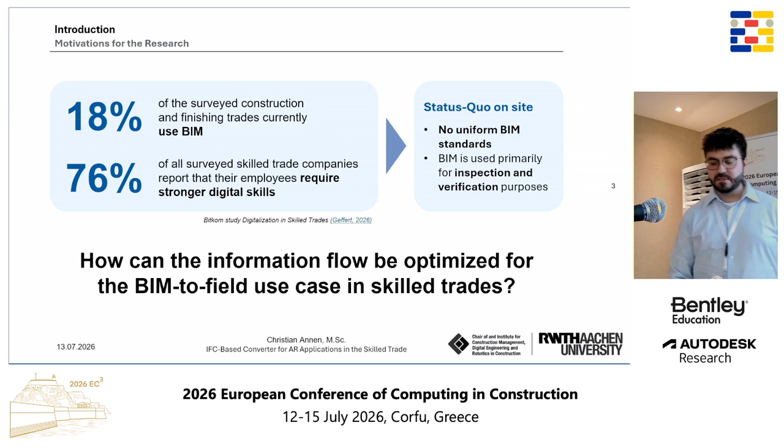So I came to the research question: how can the information flow be optimized for the BIM-to-field use case in skilled trades? And for this, I give you a quick insight into our workflow. In the first step we have the BIM-to-Unity workflow, so that the BIM data is readable by a game engine, and afterwards the data will go to the construction site. But in this paper, I'm focusing on IFC-to-Unity.

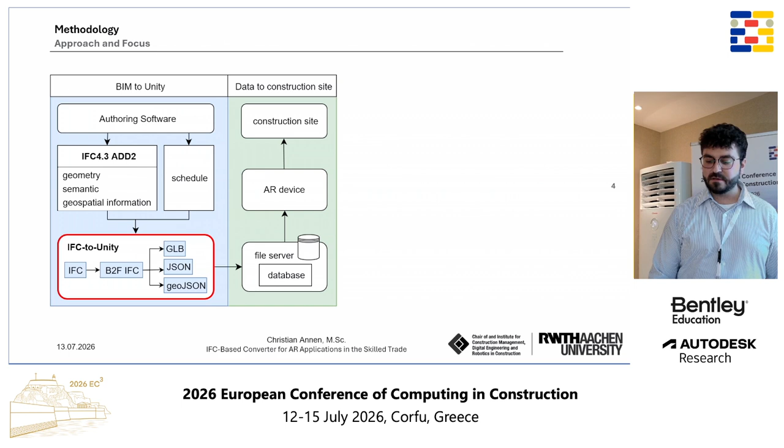So how can we get our IFC data for our use case in the form we need for the game engine? We have the IFC from the planning phase, then we enrich the IFC, and then we extract the 3D data as a GLB, the semantics as a JSON, and the spatial information as a GeoJSON. For this, I started with an exploratory literature review, and then I defined core information for this use case based on IFC.

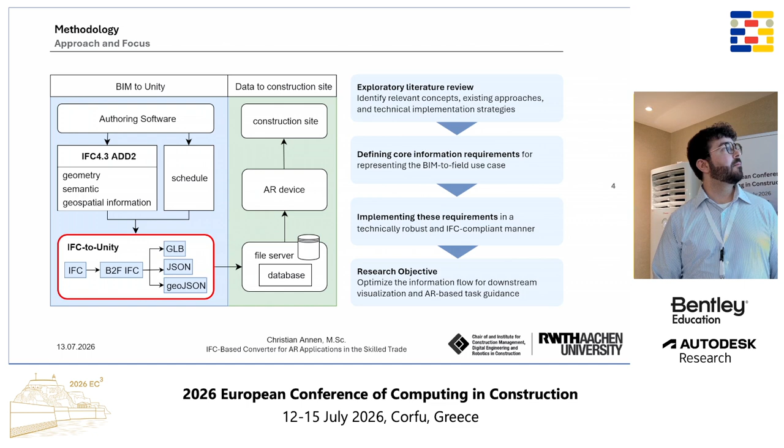Therefore, I studied the IFC schema for quite a time, and afterward I implemented these requirements into the IFC-to-Unity converter I'm presenting here. By analyzing the IFC schema, I started with a categorization: first of all, the worker on the construction site needs to know which element do I have to build, then the schedule, when do I have to build it, then who is responsible for it, so do I have to build it or someone else, and then where is it located.

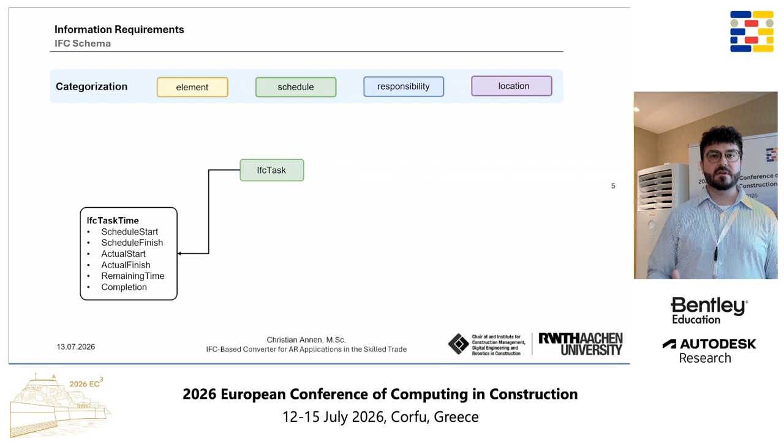To start with the schedule information, we have IfcTask. This IfcTask you can specify by IfcTaskTime. This is very good to monitor our status, so the worker on the construction site can say, okay, the completion is at 50%, and we can also monitor the times. Then we can assign to this the IfcProduct, so the element itself, and this element we can also group so that we can locate the element.

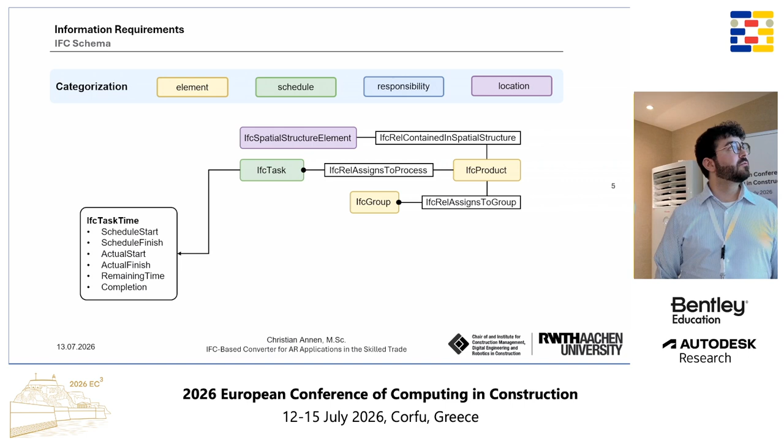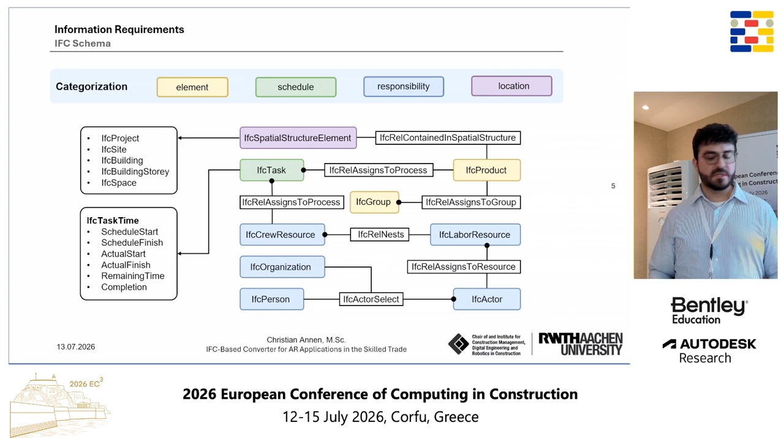We can use the IFC spatial structure, so we also have the opportunity to guide the worker inside the room he needs to go, by IfcSpace. Then to the IfcTask we can add the IfcCrewResource, so the trade itself. This trade can be specified by the labor resource if you have a special role inside your trade. And we can specify this role by an actor, by a person, or by the organization. So we have the opportunity to reach everyone on our construction site directly via the AR device.

Another interesting and I think important point is how can we bring the model to the site, and what have we considered here? For this, IFC also has quite a few options, like the IfcMapConversion. There we can store the data for the spatial placement, and this is also specified by the IfcProjectedCRS. The projected CRS is the CRS which is used in the planning phase.

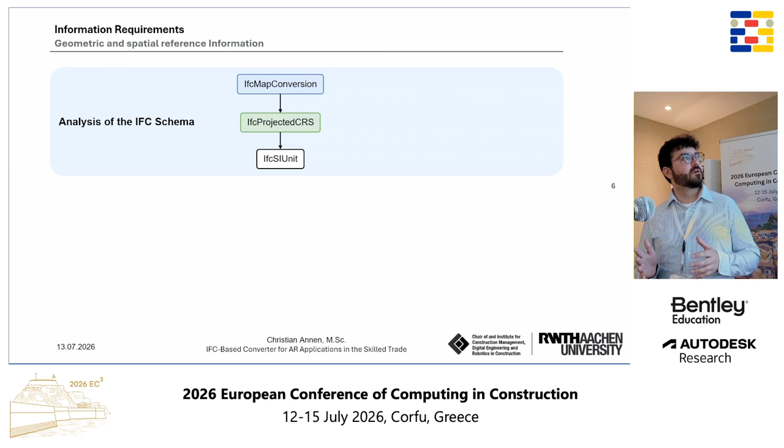And because before I became a researcher, I was a planner. So there are quite many different coordinate reference systems which are used in the planning phase. And there also the information is specified by IFC geometric representation context.

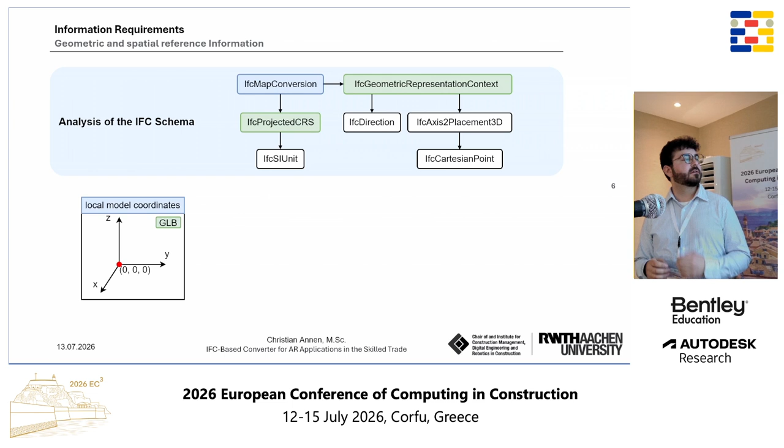And after all, how can we bring our information from IFC to the game engine? And there I looked at 3 different points. The first one is how can we get our coordinates in the GLB data. We need the model near the origin because we want to reduce spatial jitter and visualization problems. But the problem with local coordinates is you can't compare them to other plannings.

So we use a 2D Helmert transformation to transform these coordinates based on the IFC projected CRS into the coordinates we need for the planning phases. So these are stored in the JSON file.

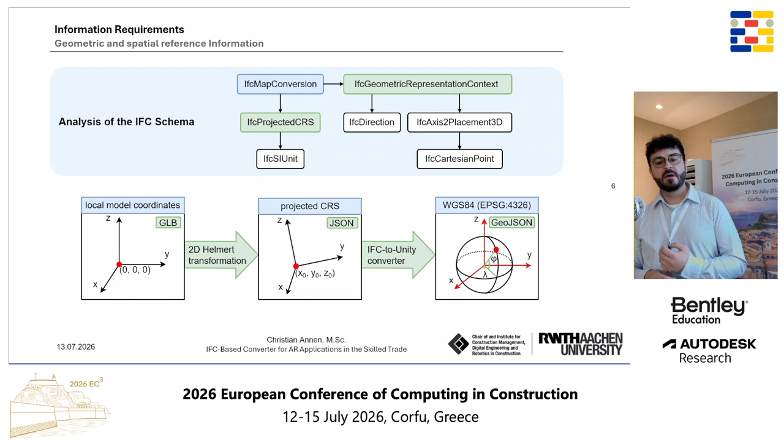And then finally, we also have the opportunity to enhance interoperability, to use the IFC-to-Unity converter to transform our projected CRS coordinates into WGS 84. The script looks if there is an EPSG code inside the IFC file and then transforms it from the source CRS into WGS 84.

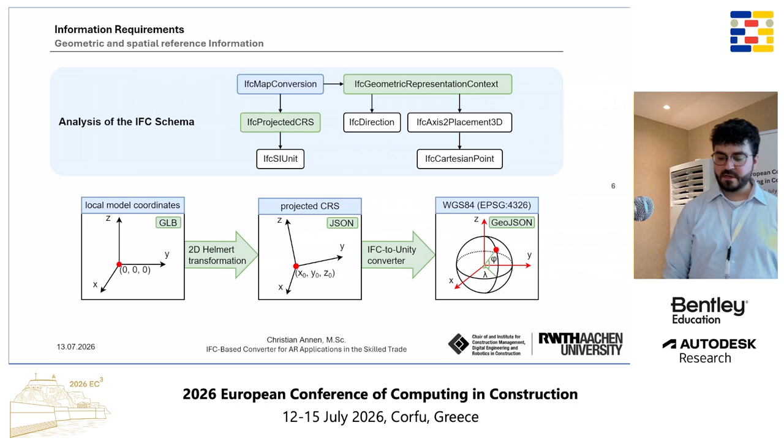And here, this is the result. So this is a graphical user interface you can use to enrich your IFC, export GeoJSON, export the JSON for the AR use case. And here you can make settings on the geospatial information, then on the geometric information, then the semantic information.

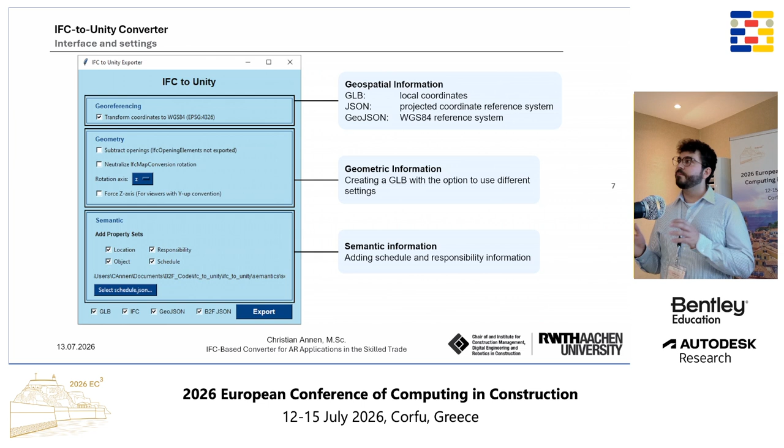And here I think an interesting point is you can connect a schedule to your IFC, and the information from the schedule is imported directly based on the IFC schema into the IFC. And then finally you have the output: the IFC, the GLB, the JSON, and the GeoJSON.

And to validate the process, I first started with an IFC out of a planning phase, so it's not the perfect IFC I needed for my task. And then I use a schedule generator to generate a schedule based on the IFC model. And then I use the IFC-to-Unity converter to enrich the IFC and then export the JSON file with the enriched information. And then I use a Python code to validate the JSON file.

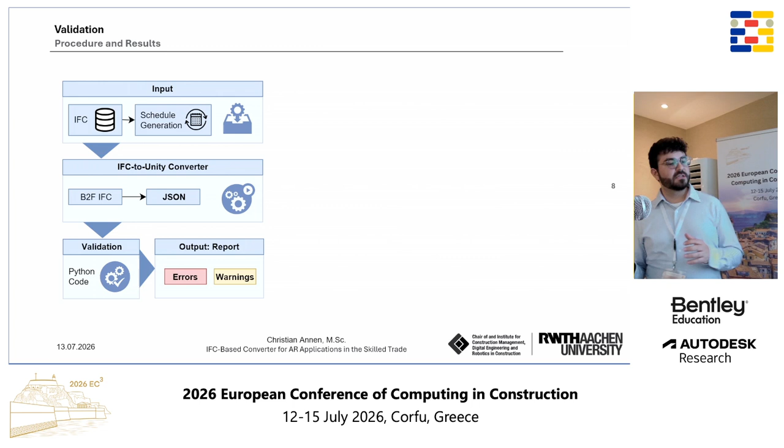Is every information I needed now in the JSON for my AR use? And after all, I've got a report with errors and warnings. And this is the output. I tested 12 different IFC files. And as you see, I checked quite some attributes, and I've got 0 errors, but many warnings.

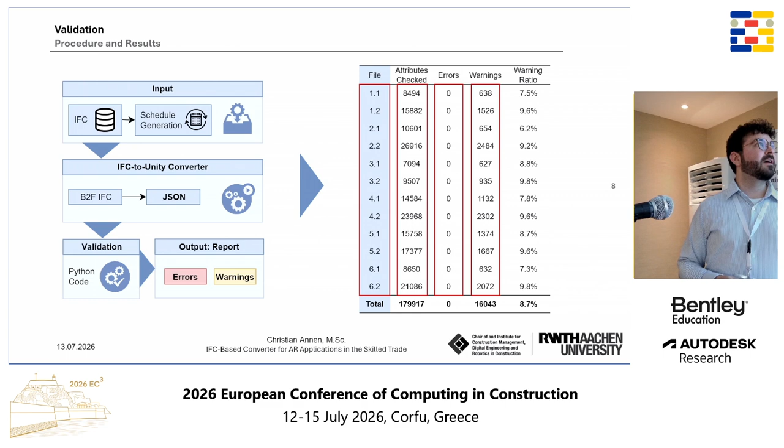And to tell you the difference, errors are when something I have defined is not enriched in the IFC file, and warnings are if the IFC file is not in the state I needed it. So because it's not an IFC I prepared for this use case, it's an IFC out of the planning phase, and because of this, there are quite some warnings.

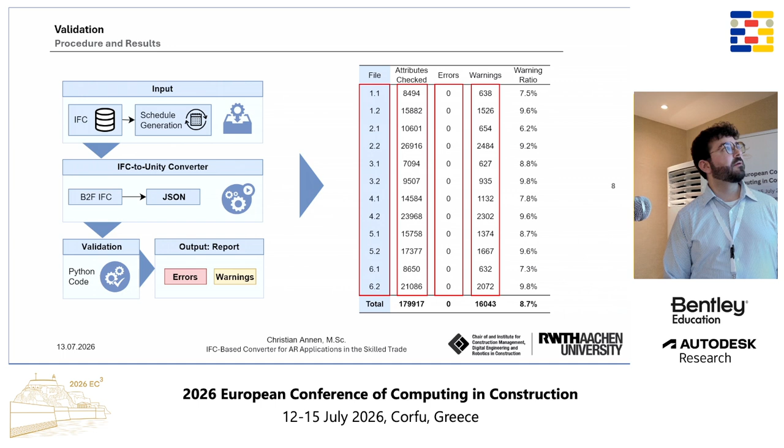And now I'm finally at my conclusion. I try to stay in time. And what have we done within this paper? We tried to optimize the data transfer to make the files readable by a game engine. And there we decided to use GLB, JSON, and GeoJSON.

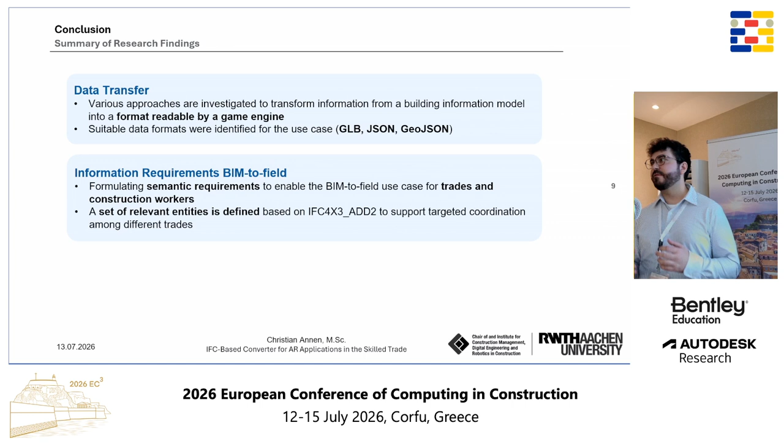Then we defined information requirements in the BIM-to-field use case, not for supervisors or something like that, but with the focus on the skilled workers. So finally, in 2 years, I hope someone can be guided by an AR application based on these findings. And this was defined in IFC 4x3.

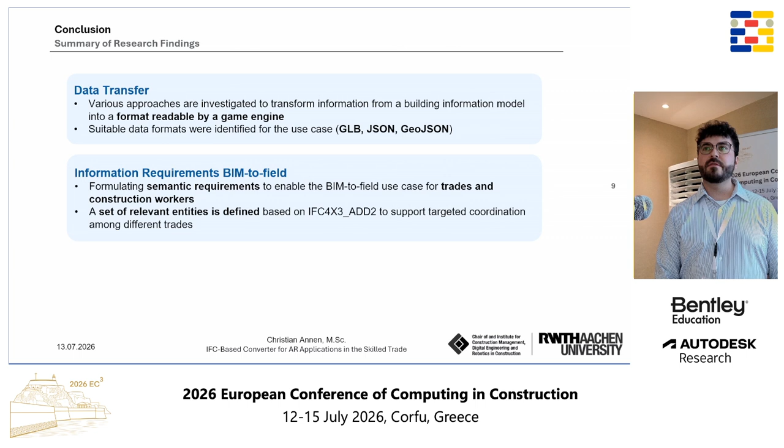And then we presented an approach how to manage the geodata and to enhance interoperability between BIM, AR on site, and GIS.